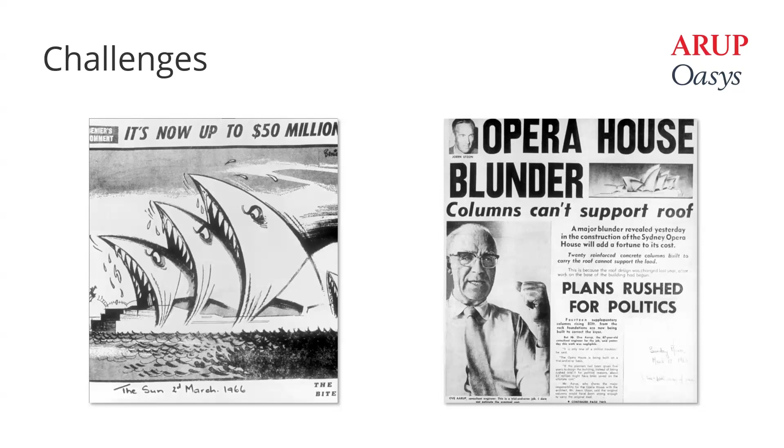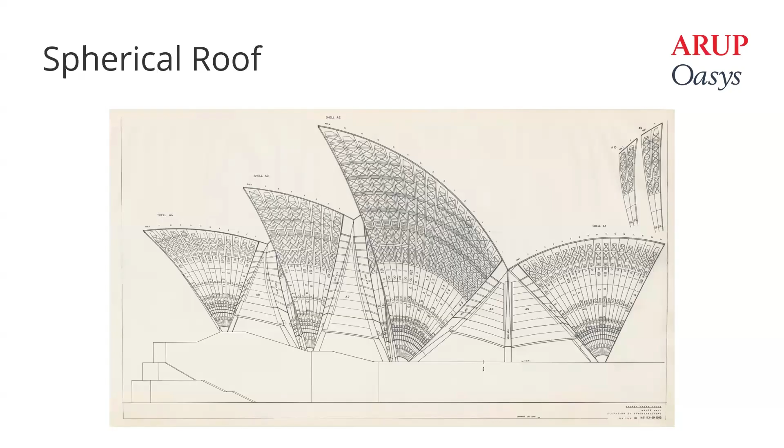The analysis of the roof was difficult. So we're talking round about 1960 here, and at that point, to analyze the roof with hand calculations was going to be very, very difficult, especially with the shapes and complex geometry. So they worked on the principle of physical models. So the very first scheme, there was a Perspex model built at 1:60 scale. And note the Perspex model was built in Denmark, but then assembled in Southampton University

Testing was done by a young graduate called Bob Emmerson, who subsequently went on to be Arup chair, and Clinton Tang, and supervised by another name, Peter Rice. So Peter Rice was a young graduate at this point as well, and his job was to supervise Bob Emmerson and Clinton Tang on the analysis of this.

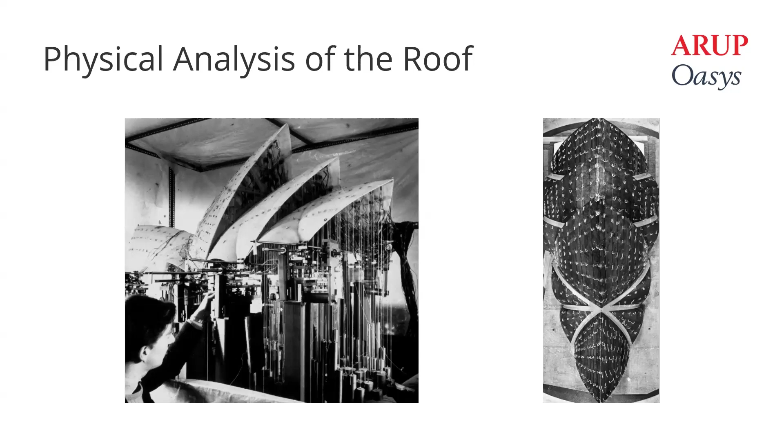Now, physical models weren't going to work. Hand calculations weren't going to work, well, at least not quickly. And the Arup team realized that they had to adopt this newfangled thing called the computer, which had been around for about a decade and had been used in the aeronautical industry, but this was the first significant use on a building project. So, as Povl Ahm said, while some use of computers had been made at Arup in the late 1950s, solving large simultaneous equations and the like, this would be the first time that a digital approach would be the primary structural analysis.

Also, Arup and Zunz said it was clear in those early days that to achieve a solution at all, to make it possible to build the structure, extensive use of electronic digital computers was necessary. It would otherwise have been almost impossible to cope with the sheer quantity of geometric problems, let alone the complexity of the analytical work. Note also there, they described it as electronic digital computers. Electronic because in the 1950s, 60s, and earlier, a computer was not a machine, but a person.

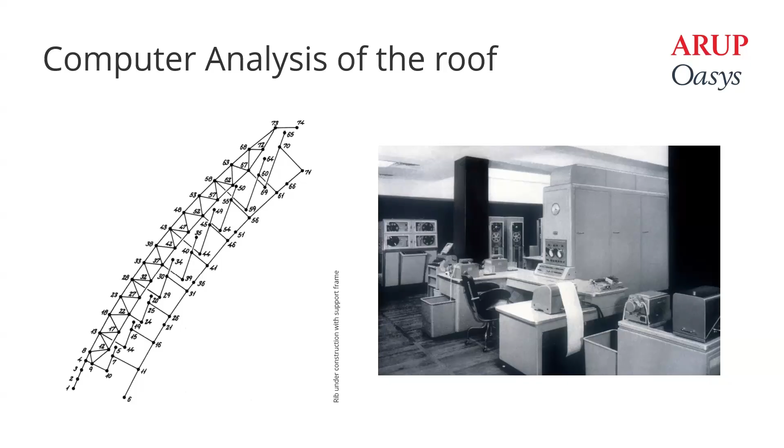In comparison, I've got a GSA model of one of the Sydney Opera House shell roofs, complete model, 1,300 nodes, 13 load cases, runs in just 2 seconds now. So there's 60 years thereabouts. Speeds have improved quite a lot.

Now, the shells get all the attention, but what I didn't realize was just how interesting the glass walls were. So glass walls, very complex shape, and an unprecedented design problem. Part of the design was done by Peter Hall, and these glass walls were required to close off the gaps between the concrete shells.

Now, in these designs, the idea was to use laminated glass for strength. Again, very new technology at the time, with manganese bronze bars and fittings connected to steel beams. The original Utzon design had plywood beams running on each rib, an idea which was eventually dropped, not least because the plywood beams would have been very, very deep and blocked out almost all of the visibility through the glass walls.

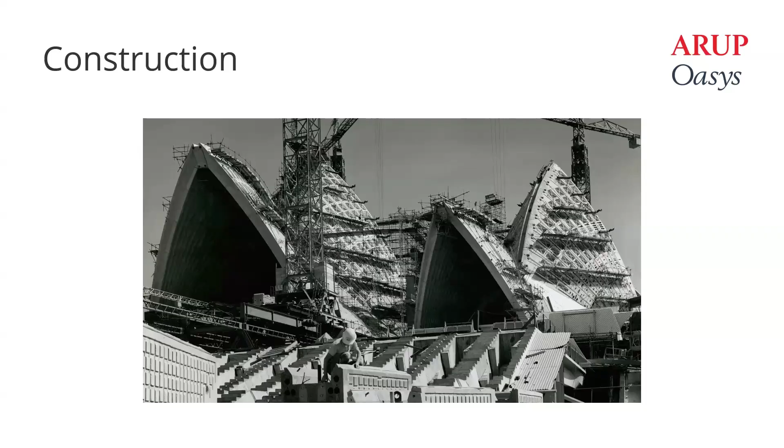So let's look at the roof construction itself. The roof consists of 2,400 precast units and 4,000 tile panels, which you can see there. These ribs were built in 4.6-meter lengths using the dozen profiles that I mentioned earlier. And this 4.6-meter length was the limit of crane capacity at that point. And even then, they had to do a global search to find tower cranes which had the capacity to actually lift concrete units of this size.

These units were all factory made on site, so there was a precast concrete factory on the site, and then the erection was done by 3 tower cranes. These tower cranes were built on tracks, which could then be gradually moved across the site as the roof was built. And if I remember correctly, construction started from the city side and then worked towards the harbour.

So each of these ribs were built on erection arches, so they're steel frames. They were then temporarily stressed. There was a computerized surveying system to check the coordinates of all the points to make sure everything was being built to tolerances. And once everything's placed, then everything was post-tensioned in both directions to full tension to ensure stability. And then once that was done, the temporary structures could then be removed.

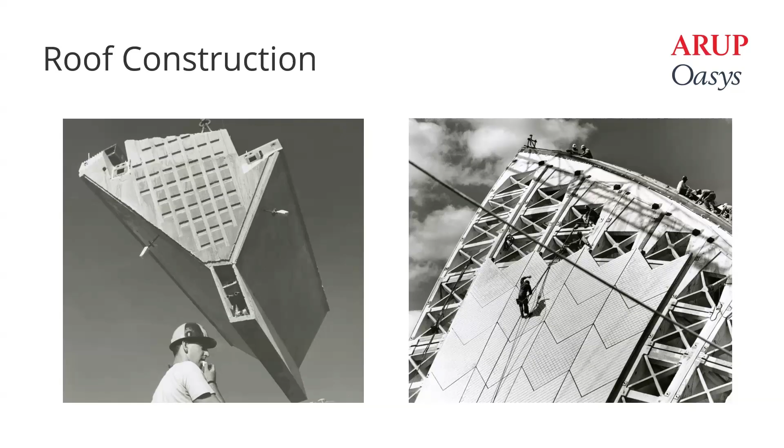Also, then the prefabricated concrete shell tiling units could be added as well. So the precast concrete cladding, these precast concrete panels had aluminium strips set into the concrete, which then positioned all the tiling, and again, these were also manufactured on site, so achieved sort of factory level construction, even though it was built in situ or on site.

And public opinion has evolved. It is now a cultural icon. It is a symbol of Sydney. It's a symbol of Australia. It is internationally recognized. You just have to show the roof and everyone knows it. There were some initial design problems, particularly acoustics. And so Arup, the company, has been involved with Sydney Opera House over the decades, including the updates to the acoustics, which I think were done about 10 years ago.

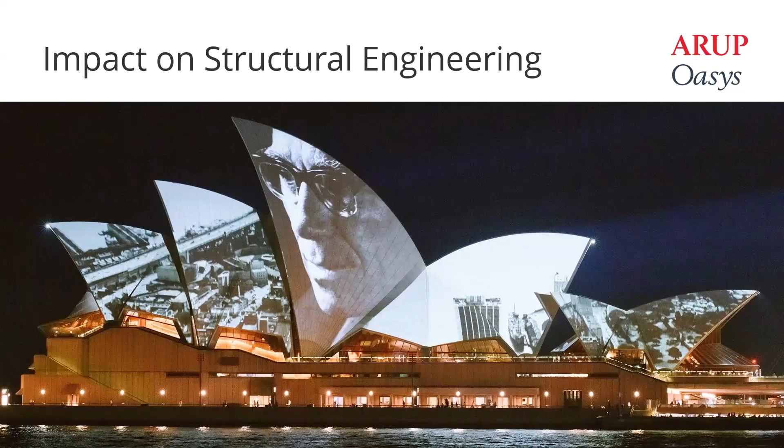So 16 years of design and construction. I think it's fair to say the Sydney Opera House kickstarted the digital age of structural engineering. And that legacy lives on today. So Sydney Opera House, what was it? A political whim, a political football, a design that could not be built, a sacked architect, 15 years of digital innovation, and now a globally recognized icon for Australia and for Arup as well. And let's face it, its legacy and impact is immense.

Further reading, the Arup Journals. There's the Arup Journal published in 1973. I think the contents were published in The Structural Engineer first in that year, and then reprinted in the Arup Journal. Both are available online. There's the Arup Journal of 1968, which was a special on Arup computing at that time, particularly the Sydney Opera House, but also many other projects being worked on in the 1960s. And there is the written version of this talk, which is also available on the IStructE website. Gosh, that was published a year ago. How time flies.

Also, on that note, thanks to Copilot, a touch of AI, which helped me put the presentation together. I said, here is the paper, suggest a presentation. Its ideas were not brilliant, but it gave me some suggestions, and I pulled it together. Never use AI for the final result, but it can be very useful for getting suggestions.

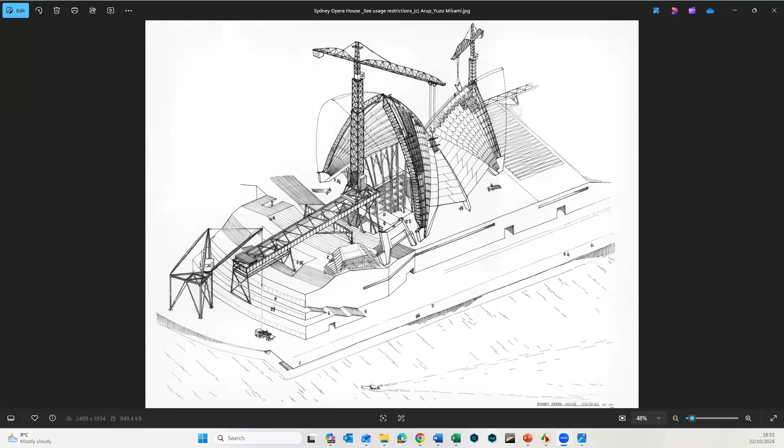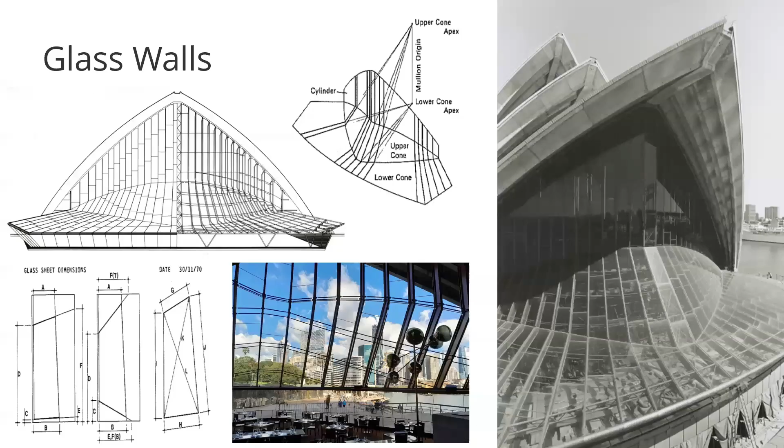Peter, Andrew has commented that he used computer analysis for hyperboloid cooling towers in the early 70s, and they also used software written by CEGB, which ran on their own mainframe, with the input by entirely unforgiving punch cards. Yes, I believe it. I never quite got to use punch cards myself. My brother, who's a few years older than me, did, and apparently there are many stories of punch card blocks being dropped and that sort of thing. Then you do all the punch cards, get the results back and go, there's a problem somewhere with the cards. I wouldn't fancy doing punch cards.

I mean, they were a game changer originally. There's a fascinating book called Turing's Cathedral, which is all about the creation of the ENIAC, the American programmable computer, which was built during the Second World War. And they were talking about using punch cards for the input, but also punch cards for temporary data storage, where machines would actually be creating the punch cards for data and then read them back in again and so on. Apparently, a small run might use 1 million punch cards. So they were an impressive technology, but we moved on.

My bits were taken entirely from the Arup sources, plus some bits from the Sydney Opera House website itself as well. They've got some of the history. There's definitely a PDF copy of the original design competition entries brochure as well, which is available online on the Sydney Opera House website.

We've got another question from Kevin. I think you said that a modern analysis has been carried out using 1,000 or so nodes. Has a modern full analysis been carried out for the whole Opera House? I don't know. I know that I've seen models of the individual roofs were done as part of the refurbishment or some work which was done around about 2000. I would say probably, but I don't know for certain.

I mean, heck, when I was a student, this would have made an interesting dissertation project, modeling the whole Sydney Opera House. So I suspect it's been done. I've not seen it.

Thank you. Sorry, could I jump in with a question? Sure. Sorry, I can't find the hand up button. So thanks very much, Pete.

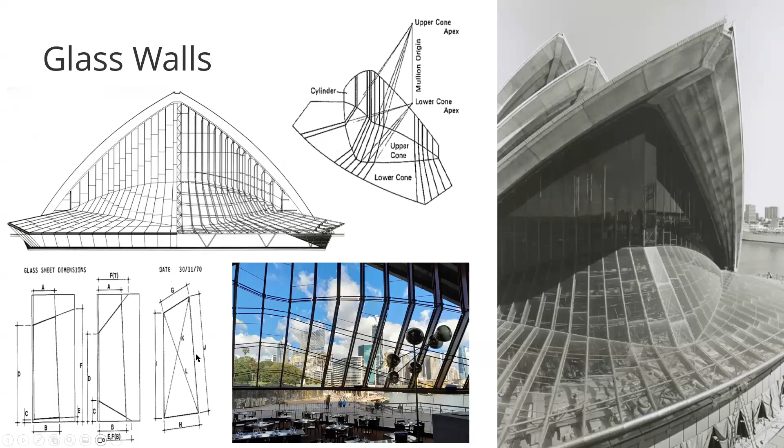It's been really interesting. I was quite taken by the slide showing the evolution of the roof structure, and I couldn't help but think about fees. I'm guessing there was like a river of fees flowing into Arups at the time. Was it a really significant project for Arups at the time? Did it really help make Arups what it is, or did it nearly break Arups? Both, I think.

I don't know the detail, but reading back through Arup's biography and some of the other papers at the time, there's definite indications that it nearly bankrupted Arup. But it didn't, and they came through the other end. Likewise, in the Arup journal special, they talk about nearly dropping themselves off the project. There may have been a lot of money coming in, a lot of people working on it, but whether it made a profit or not, I don't know.

Subsequently, the end result of it made a huge difference to the company. At the time, I think it was a squeaky bum time, as they say.

Andrew asked whether Ronald Jenkins, who had carried out calculations for the Brynmawr rubber factory shells, was still very active within Arups. Was he involved in the design and analysis of the roof? I don't know. I remember the name. There were a lot of people involved and a lot of projects going on as well. This definitely wasn't the only project. So possibly, but I couldn't say either way. That information might be buried in the archives somewhere.

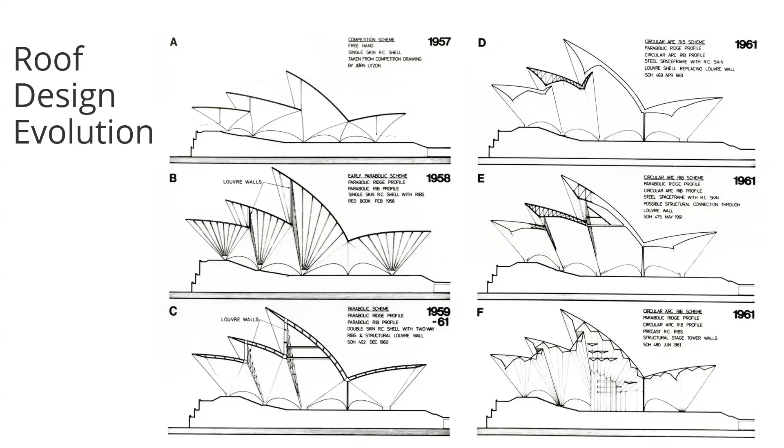Andrew has commented again: Jenkins was one of the partners. So I'm thinking he might have got a name check. The thing to do is to review the two Arup journals. Did he get mentioned in at least one of those? I can't remember. He might have done. They're both available online; all the Arup journals are freely accessible. Interesting reading, a lot more detail than I've gone into here. This is very much a high level summary. Each component would be a major presentation in its own right.

Thanks, Peter. Any more questions? Have you been to Sydney, Peter? I have. Got to visit once, must be about 10 years ago now. Visited the office there. I did have to do my pilgrimage to the Opera House. Yes, has to be done. Yes, fascinating. Didn't get a chance to go inside, unfortunately.

But I must admit, at that point, it was just an icon. With subsequent research I've been doing on the project, I think I have a much better understanding of what it was all about. It's a fascinating project, a difficult project. I'd be very interested to go and revisit it now with what I've learned over the last couple of years.